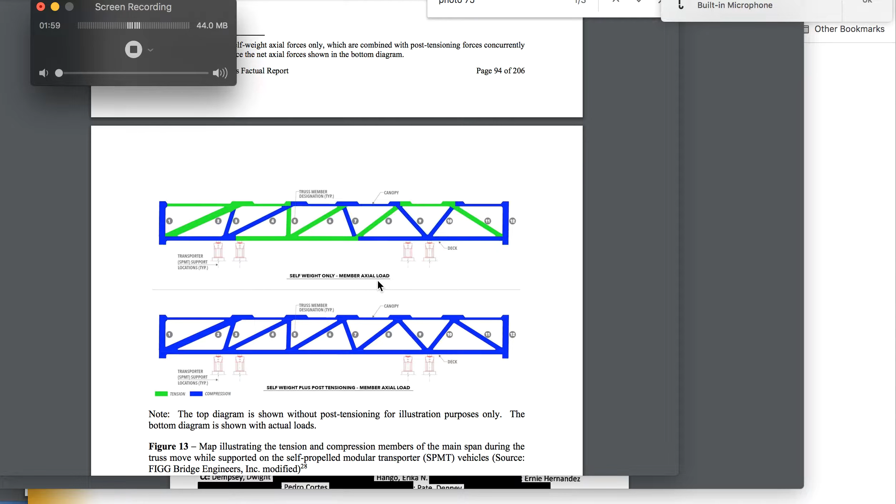Okay, so here I have part of the NTSB report, page 94 of 206. Well, let's just look at this first. Self-weight only member axial load, self-weight. This is the one that was doing transportation.

We have, where is it? That's just showing it. Yeah, I brought this to you guys' attention numerous times about detensioning, and this is part of the drawings. So I'm not going to toot my horn about that, but I'm just telling you what you're looking at. That was already talked about. They talked about moving the structure.

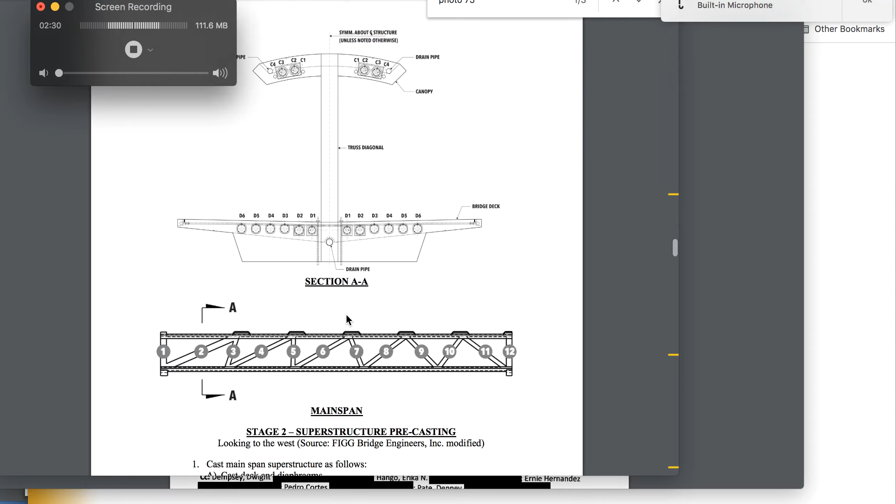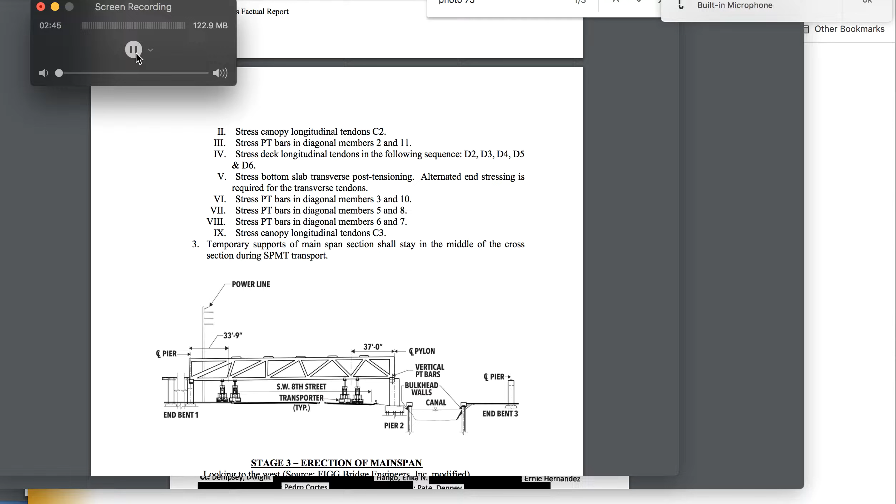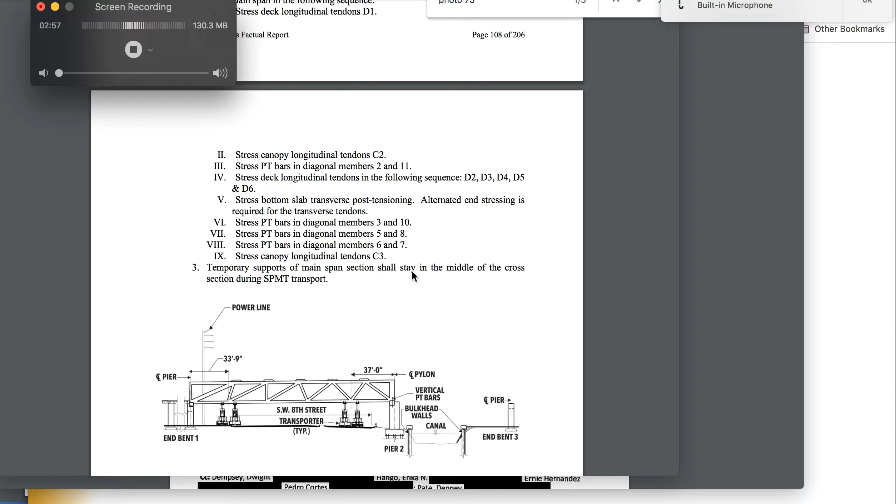Let me pause it for a second. I'm trying to find the color diagram. Before I do that, take note of this, number 3 here, page 109 of 206. Temporary supports of main span section shall stay in the middle of the cross section during SPMT transport. And obviously that didn't happen.

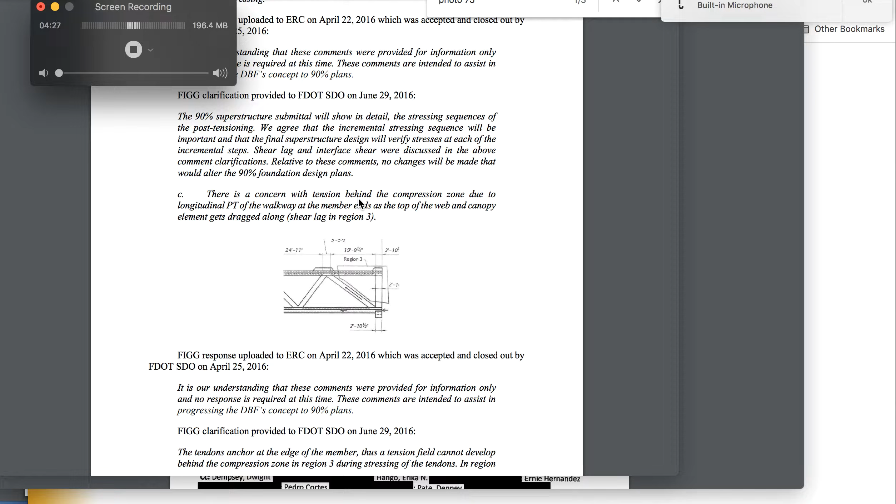So the credit goes to the report by Denny Pate, FIGG rather. There's a concern with tension. This is FIGG speaking, let me clarify that. FIGG clarification provided to FDOT, June 29, 2016. This is before the collapse.

C. There is a concern with tension behind the compression zone due to longitudinal post-tension of the walkway at the member ends, as the top of the web and canopy element gets dragged along, shear lag in region 3. So this was already talked about, look at it. There's a triangle - I talk about this triangle too, and there it is in this drawing here. Let me see if I can zoom in a little bit.

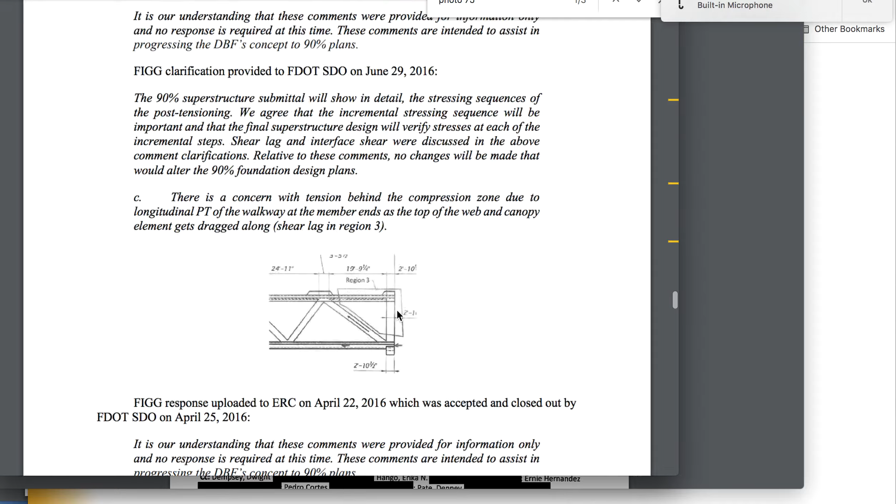FIGG responded. Let me get rid of this pause here.

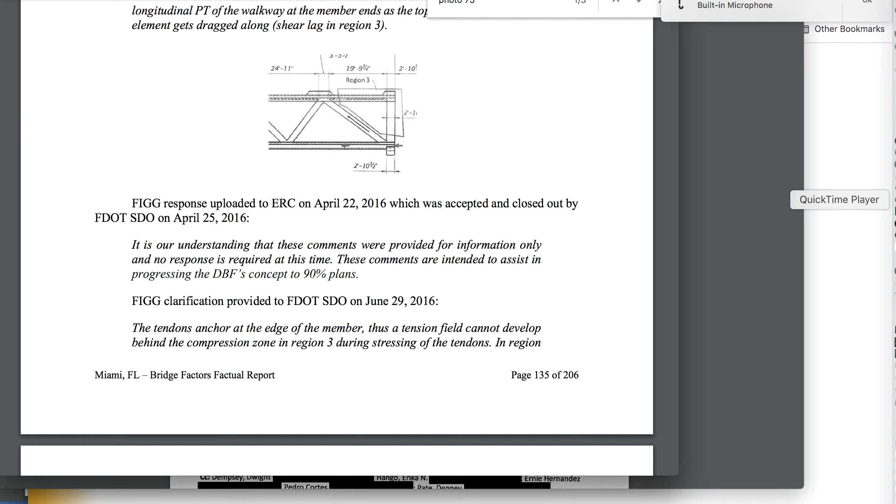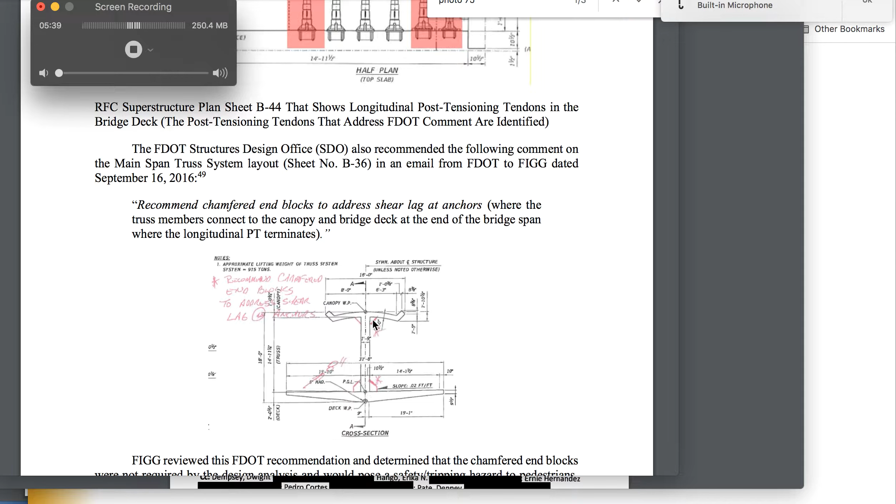So looking at this report, now we get clarity on exactly what this means. FDOT recommended these chamfers to FIGG. This is not a detail to show us behind it, but it was recommended, looking at the end of the structure, these chamfers would be added. They talked about the back span and the main span throughout the entire deck, all the verticals and horizontals, all the points. And they addressed it, talk about it as shear lag.

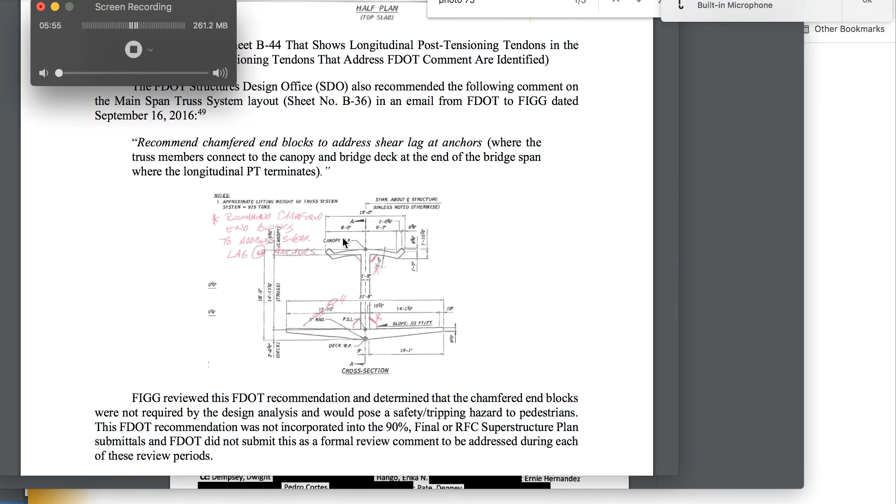Nothing to see here yet.

Well, I guess I should say that FIGG reviewed the FDOT recommendation and determined that the chamfer end blocks were not required by the design analysis. It would pose a safety tripping hazard to pedestrians all the way down. Of course it would, it is a tripping hazard. And the design says it's not required, using the computer programming, etc. Independent peer review programming by Louis Berger. I'm going to pause and read on and jump back in.

Okay guys, so this is kind of important. Treatment of the construction joints at the south abutment columns, as discussed between the CEI, MCM, and FIGG.

Let's cut to the chase down here. June 13th, this is before the accident, 2017 email correspondence was specific for the construction joints at the columns of the south abutment. The construction joint requirements between the vertical truss members and the deck/canopy were never discussed among the CEI and contractor/engineer of record. That's weird.

Okay, in addition, the vertical truss members of the deck canopy joints are not detailed or noted with any specific requirements. All right, so here's the thing.

They said if that's the case, that's why the OSHA report said they should have roughened it, following specification 400-9.3. The specification requires the surface of hardened concrete be roughened, cleaned of loosened particles.

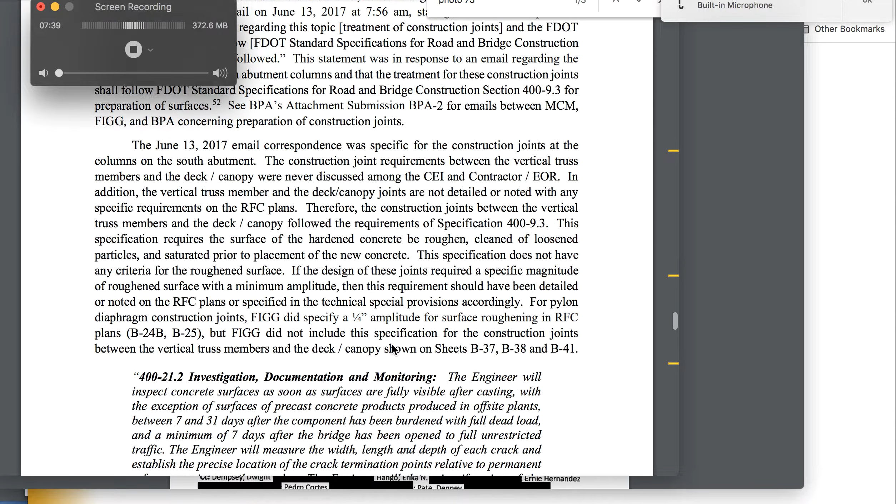Okay, so then this is what they're saying. They never talked about how that thing was going to be done. That's interesting, so it appears they left it to the contractor to figure it out.

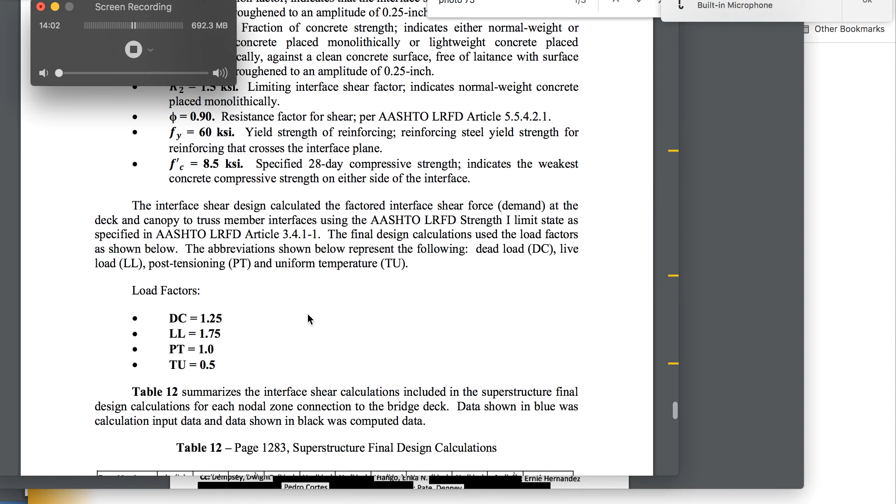And I want to keep reading for you guys. Let me jump on. Oh, so it looks like the line of questioning just terminates. That was the answer. And yeah, you can see the reading. It just terminated. Hold on. Let's see if it picks back up. Okay, let me pause it. I'm going to slide down. Read more.